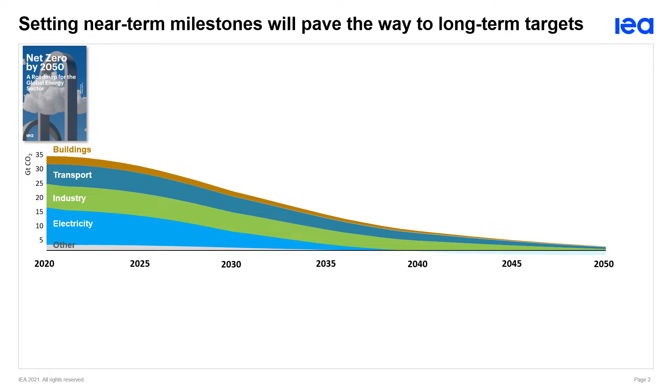One of the key components of our analysis is a series of detailed milestones, more than 400 in total, which can help governments see the scale of the challenge ahead of us. To provide just a few examples, annual solar PV and wind provide around 40% of electricity generation globally in 2030, up from 9% today. Electric car sales must rise to about 60% of total sales by 2030, compared to 5% today. By 2035, there are no new sales of internal combustion engine vehicles globally. With regards to buildings, 20% of the existing stock globally must be retrofitted to be zero carbon ready by 2030, compared to less than 1% today.

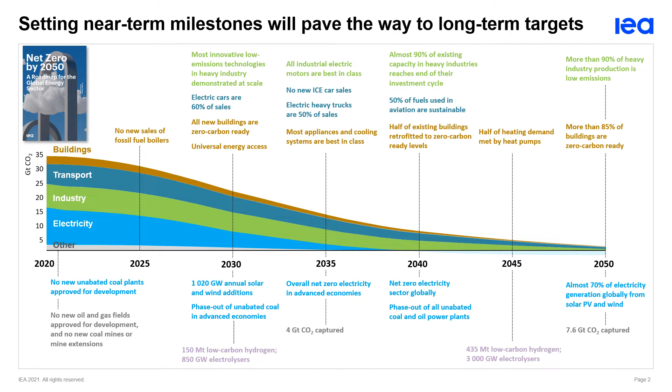So what does net zero by 2050 mean for the industry sector? Essentially, there is no refuge for emissions in the net zero emissions by 2050 or NZE scenario. Every sector must play its part, and the industry sector is no exception. Furthermore, it is too large to be entirely offset by carbon removal technologies in other sectors. Industry emissions account for about a quarter of global energy system emissions today.

Three heavy industry sectors, steel, cement, and chemicals, which produce materials that play a critical role in our daily lives, account for around 70% of the emissions from the industry sector, and these emissions are some of the most challenging to tackle. There are several reasons for that. Heavy industry sectors use large quantities of fossil fuels for generating high temperature heat, as a feedstock and as a reduction agent. The problem is that fossil fuels provide these energy services so well and so cheaply. Directly substituting fossil fuels used for these purposes in heavy industry with electricity at the scale required is impractical or expensive in most instances today.

Industrial process emissions also pose a challenge, as they cannot be eliminated simply through fuel switching. Because of these technological challenges, technologies that can achieve substantial emission reductions in the production of these materials tend to be at an earlier stage of development or technology readiness than in the power and passenger transport sectors, for instance. Here we are talking primarily about carbon capture and storage and hydrogen technologies, but also direct electrification technologies such as iron ore electrolysis and electrified cement kilns.

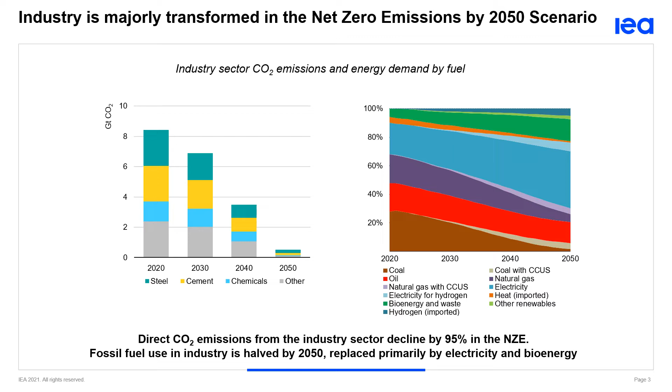Now let's go deeper into what is needed for the industrial sector to align with the net zero emission by 2050 pathway, focusing specifically on the challenging emissions from heavy industry. An array of mitigation strategies are needed. In the short term, much of the emissions cuts will come from incremental improvements within existing technologies. This includes improving energy efficiency and material efficiency. These two strategies account for around half of emission reductions to 2030 in the scenario.

In the longer term, incremental strategies will be insufficient on their own to achieve the deep emissions cuts required in the net zero by 2050 scenario. Innovative technologies will be needed. Here, carbon capture and storage and hydrogen play the largest role, contributing around 50% of the emissions reductions in heavy industry in 2050 in the NZE.

These technologies enable the provision of large amounts of high-temperature heat, which in many cases cannot be easily provided by electricity with current technologies, and help to reduce process emissions from the chemical reactions inherent in some industrial production. As a consequence, we see a large role for technologies that are not yet market-ready, with technologies that are at the demonstration or prototype stage today accounting for nearly 60% of emission reductions in 2050.

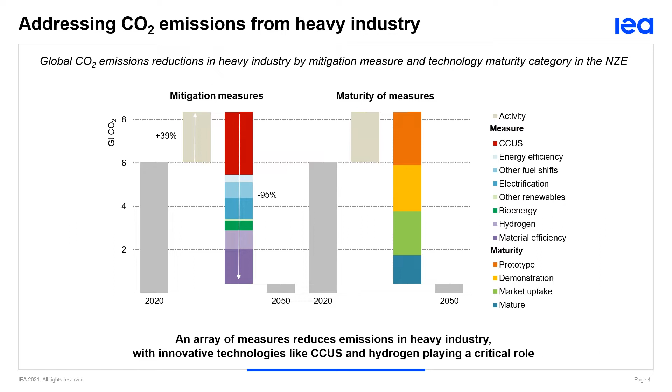Besides the strategies already mentioned, fuel shifts from coal to gas and use of bioenergy and electricity also play a role, the latter two in particular for ancillary processes where low temperature heat is required. Now let's focus in on a few of these strategies.

Material efficiency is an important strategy in the NZE by 2050 scenario, accounting for about 20% of emission reductions in 2050. In the NZE, global demand for materials remains robust due to continued economic development and population growth. However, material efficiency helps to curb growth in demand, in turn helping to lower emissions. Taking steel as an example, opportunities for more efficient use exist across the value chain, from the steel manufacturing plant to downstream designers and manufacturers, all the way to the use and end-of-life phases.

In the net zero emissions by 2050 scenario, steel demand is increased through building clean energy infrastructure. This includes demand from particular end-use segments, that is the power sector, which has about 3 times higher demand than in the baseline projection, and rail infrastructure, which is about 1/3 higher. However, these segments account for a relatively small share of total end-use steel demand to begin with, and the increases are far outweighed by the combined impact of demand reduction through material efficiency.

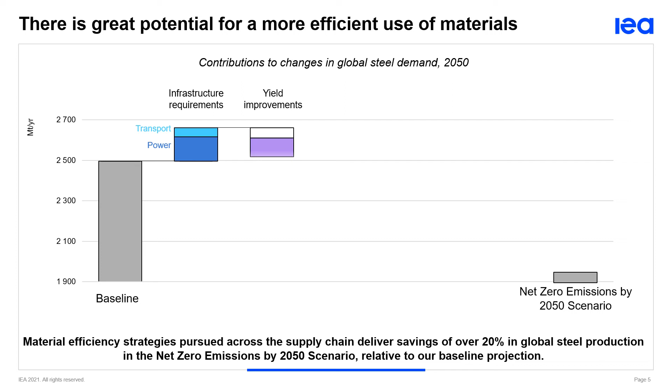A portion of the demand reduction occurs by reducing scrap generation during manufacturing. A much larger contribution is made by changes in the design and use of steel products. For example, the single largest contributor to demand reduction is extending the lifetime of buildings. Many buildings are currently demolished before the end of their technical lifetime, and so taking the opportunity to refurbish and repurpose these buildings leads to a considerable reduction in material demand.

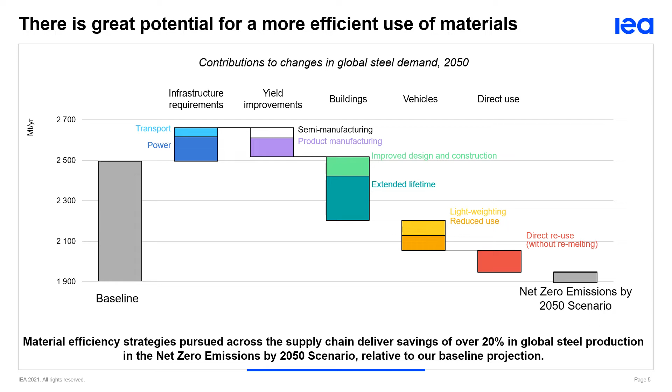In the vehicle supply chain, contributions come from lightweighting and reductions in vehicle sales driven by mode switching. Together, these strategies result in steel demand that is 20% lower in 2050 compared to a baseline trajectory. Additionally, increased recycling helps reduce the amount of more energy-intensive primary production that is needed.

But of course, material efficiency can only get us part of the way, and so the remainder of production must be produced with near-zero emission methods and technologies. As mentioned, many of such technologies for heavy industry are not ready for market and thus require rapid innovation over the next few years to get them ready for deployment.

In the NZE scenario, earlier stage innovative technologies grow from just a handful of mainly demonstration and pilot scale plants today to account for around 10% of total heavy industry output by 2030 and 95% by 2050. To reach this 2050 target would require that nearly all capacity additions are innovative near-zero emission routes by around 2030.

The specific near-zero emission technology profile differs by material. For chemicals, we see a large role for carbon capture and storage due to its more competitive economics compared to alternatives, and since CO2 separation is already used as a part of certain production routes, such as ammonia production. We do, however, see a role as well for production based on electrolytic hydrogen, directly electrified steam crackers, and bioenergy.

For steel, the technology split is more distributed. We see a major contribution from hydrogen-based direct reduced iron and also from carbon capture and storage applied to natural gas-based direct reduced iron, innovative smelting reduction concepts, and retrofitted blast furnaces. We also see a considerable role for iron ore electrolysis.

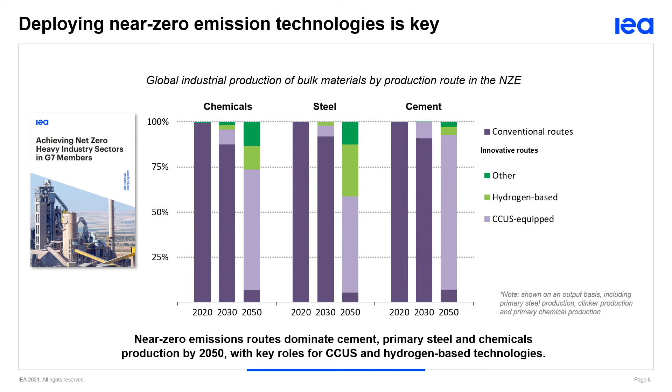An area that we have been working on this year at the IEA in the context of the G7 industrial decarbonization agenda is developing definitions for low and near zero emission steel and cement production. This can help establish a shared vision on the future for key production processes in heavy industry sectors and can underpin enabling mechanisms such as public and private procurement initiatives and regulatory measures. I'd invite you to take a closer look at our G7 report, available freely online if you're interested in further details.

It is evident then that there is much work to be done, and it is also clear that time is of the essence. Industrial equipment like blast furnaces and cement kilns tend to be long-lived and capital-intensive. The typical lifetime of these assets is around 40 years globally. When we take into account the latest refurbishment, we estimate that the average age today is around 10 to 15 years old globally, so these assets are only around 1/3 of the way through their lifetimes.

Without any alteration to their current mode of operation, we estimate that existing heavy industry assets could lead to around 150 gigatons of CO2 emissions if operated until the end of their typical lifetimes. Just the emissions from these assets, leaving aside any capacity additions and replacements, exceeds the sector's net zero by 2050 scenario emissions trajectory. However, it's not all bad news. Changes can be made to this existing capacity, including incremental energy efficiency improvements, blending in of low-carbon fuels, and retrofitting with carbon capture and storage.

Additionally, there is an opportunity presented by the dynamics of investment cycles, whereby every 25 years or so, a plant operator will face a decision whether to renovate or extend the life of key capital-intensive assets. If these investment cycles are strategically considered and new low-carbon innovative technologies are ready in time to replace existing assets when these investment decisions arrive, we estimate that around 40% of emissions from existing heavy industry assets could be avoided.

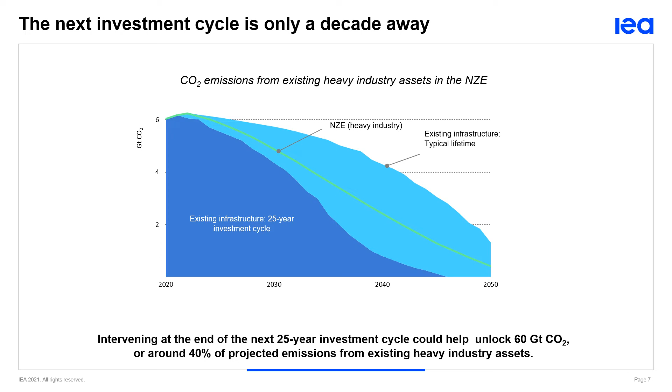Now, we're not saying that there's been no progress. In fact, quite the opposite. Recent technology developments and policy actions suggest momentum is accelerating in some important regions and sectors. For example, initial estimates point to 2022 being a record year for renewable electricity capacity additions, with an increase of about 340 gigawatts, roughly equal to the entire installed power capacity of Japan. And the pipeline for both hydrogen projects and carbon capture and storage facilities continues to expand.

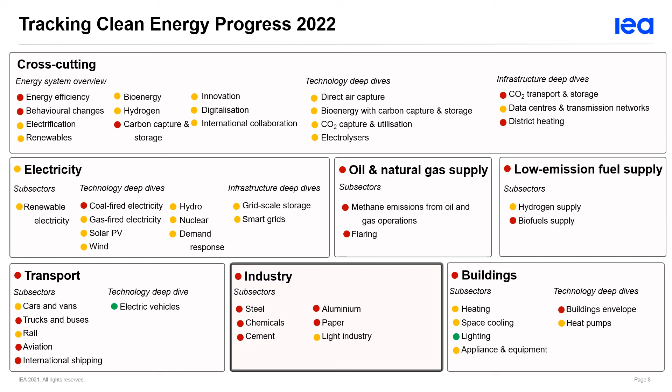In the industry sector, last year we reached an important milestone with the first fully fossil-free hydrogen-based steel delivered at the pilot scale. We are now seeing increasing commitments from governments and the private sector for procurement of low-emission materials, and recent policies such as the US Inflation Reduction Act, REPowerEU, and Japan's GX League will provide important supports for the industry transition. Still, much more is needed and at a faster pace across all regions of the globe to get the industry sector on track.

So how do we accelerate the industry transition? Not surprisingly, there is no one quick fix policy or solution. Rather, coordinated efforts on multiple fronts across a diverse range of stakeholders are required. This includes governments and industrial producers in a leading role with valuable contributions from many other stakeholders.

The overarching driver of change lies in setting long-term plans and establishing a clear, reliable policy signal for emission reductions, as well as aligning incentives to mobilize the finance and investments needed for clean technologies. Here, governments will play a key role by formulating transition plans and roadmaps, adopting long-term emission reduction policies such as carbon pricing or industry CO2 performance standards, and helping mobilize private sector finance.

Additionally, targeted efforts are needed for specific technology categories, including emissions-intensive technologies that will still be required for some years to come, and clean technologies that are at varying stages of development today. Industrial producers will need to make careful plans for their existing assets and the timing for the rollout of new lower emission technologies. Both public and private sector efforts are needed to help create a market for near zero emission materials such as steel and cement, which may initially be more costly than when produced with conventional technologies. Policy options here include carbon contracts for difference, public procurement, and minimum content regulations.

Innovation is still needed on technologies that are not yet market ready, which will require efforts of industrial producers and government support to pilot and demonstrate these technologies. With regards to material efficiency, efforts from actors along value chains from design to end of life will be important. Governments can support these efforts through modified design regulations that consider full life cycle emissions and that promote longer lifetimes where advantageous, and through setting up improved scrap collection and sorting channels.